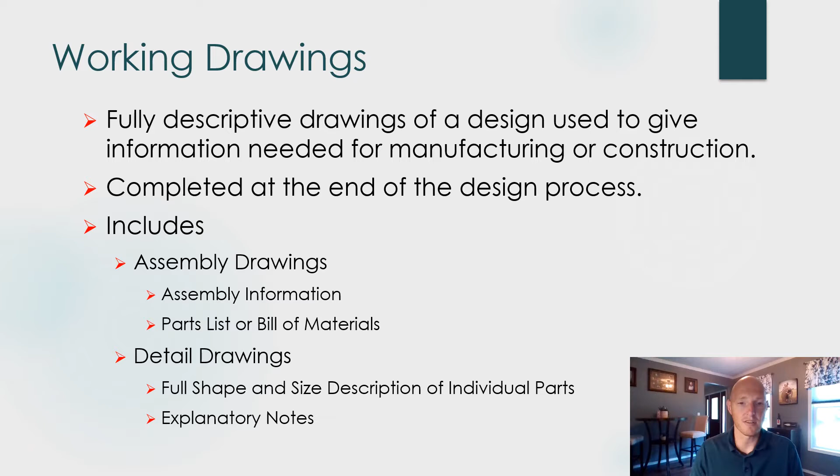So your working drawings are going to include assembly drawings that show how everything goes together. It's going to include a parts list or bill of materials showing all the different components that go into your design, as well as detailed drawings, which is what we've spent most of the semester working on. The detailed drawings give us the full shape, description, details with the dimensions and materials and all that good stuff to create all the individual parts of your design.

So the assembly drawings are typically done after the detailed drawings are completed. So you know what all those individual parts of your design are going to look like, and now you can show how they all go together. One of the things that is going to benefit you from creating those individual part drawings first is that you can copy that geometry from those drawings into your assembly drawings, as you'll see when you complete the tutorial today.

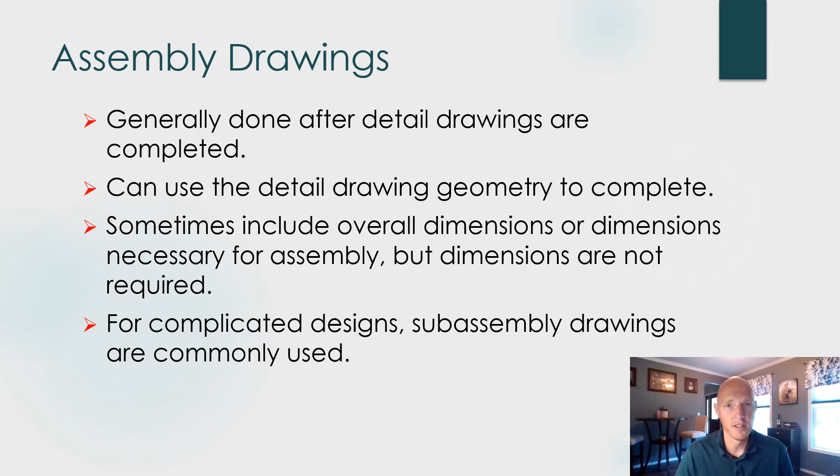Sometimes you might include some overall dimensions for the assembly drawings, but typically they're not necessary because the dimensions are included in those individual part drawings. If you have complicated designs where there are a lot of parts, a lot of assemblies, you might have sub-assembly drawings. For example, if you were designing a car, you wouldn't create an entire car off of one assembly drawing. You'd have sub-assembly drawings for all the different systems of that car.

Assembly drawings are not always section views. I know that's what you're going to see in your tutorial, but section views are only used if necessary. As the designer, it's going to be up to you to decide what kind of views are necessary to best show how the product is assembled. So it might be a section view, you might have auxiliary views, it might be just traditional orthographic projection, or maybe even an isometric drawing.

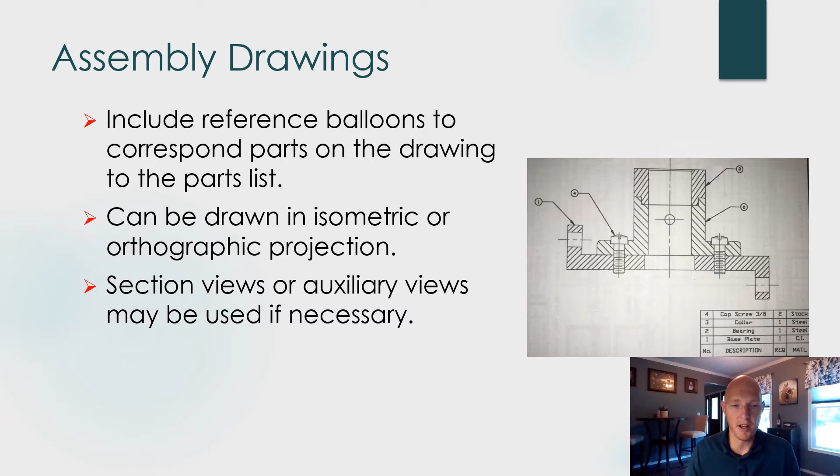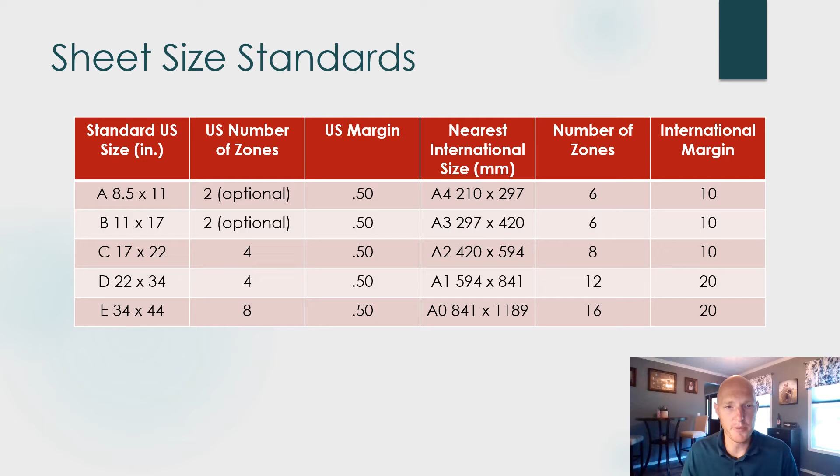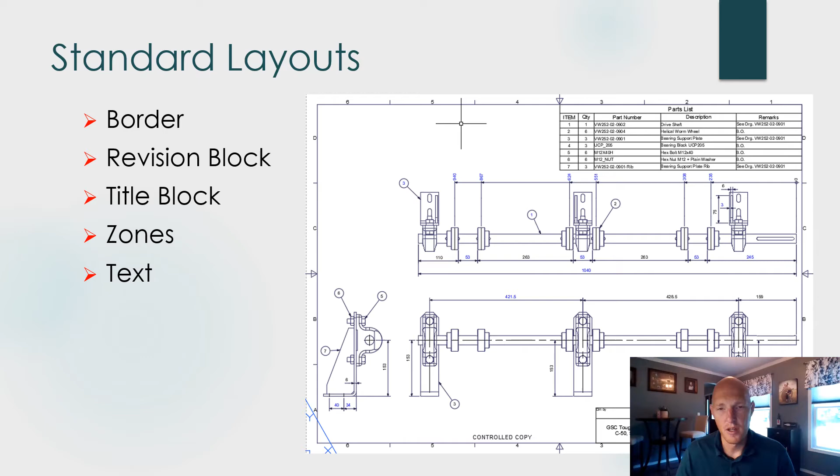Again, you're using the same sizes of sheets we've talked about earlier. Using standard sheet sizes, sometimes you may find that you need to use larger sheets to be able to fit the assemblies on properly. In a standard layout, you're going to have the border. You might have a revision block showing which version of the design, if you have updated versions. You're going to have a title block, and you might break the page into zones with larger size sheets.

Some additional types of drawings that you might see include exploded assemblies, which help to see how the parts fit together. You might have weldment drawings for things that are welded together, as well as structural drawings or schematics. We'll take a look at some examples of each of those.

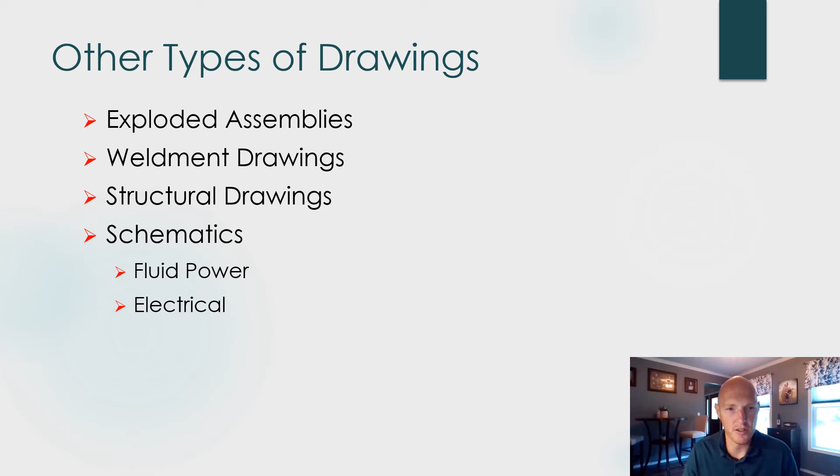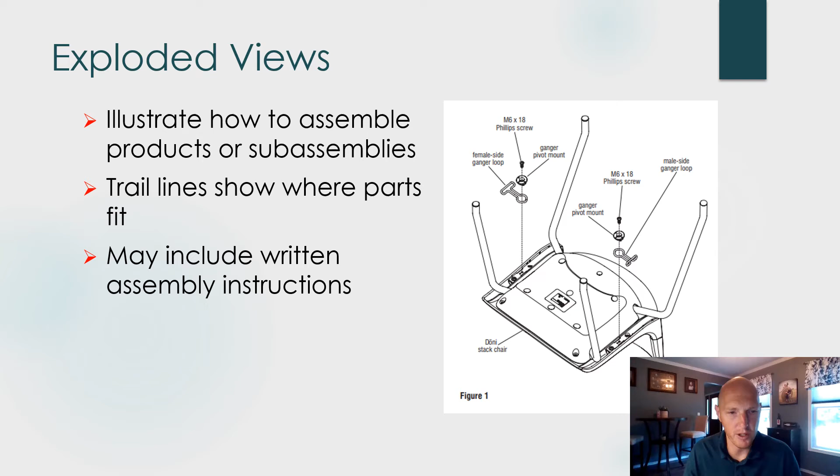So here's an example of an exploded view of a chair. So you can see here, instead of having the parts shown as they go together, they're exploded, they're pulled apart. So you can see the fasteners that are used to hold the clips onto this chair are shown as being pulled away from the part, and then we have trail lines that show us where those parts fit in as they're assembled. So these are great for creating assembly instructions.

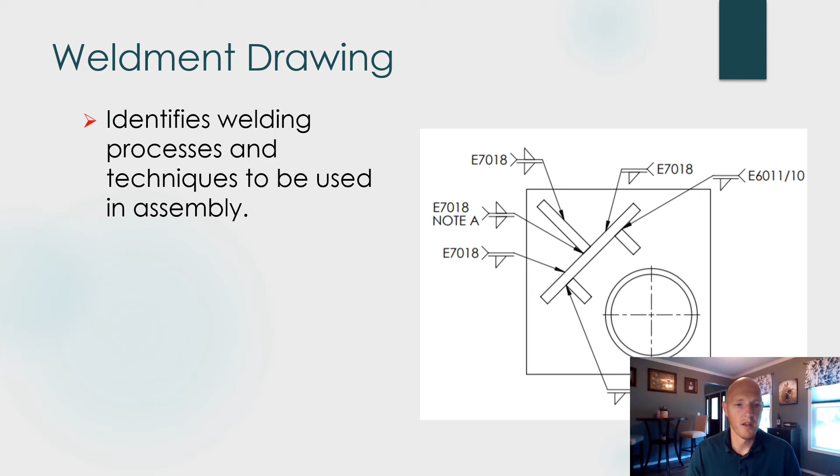A weldment drawing is going to have welding symbols on it. So those welding symbols are going to show the techniques that are to be used when assembling that weldment.

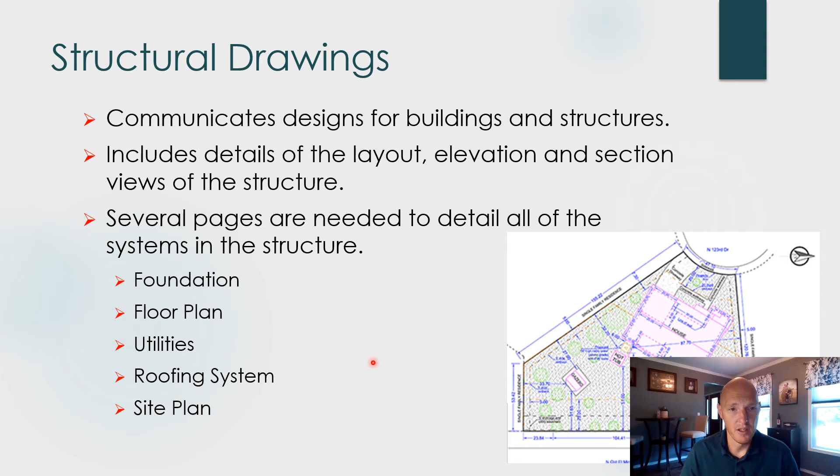So if you're working in the construction industry or designing a building for some purpose, you're going to have lots of different drawings that go together to make up that design. Here's an example of a foundation plan and a section view of a building. So you can see that foundation plan shows where all the walls and the footings of the foundation go together

in this building. And for the section view of the house, you can see that section view shows all the different parts of the house and how they get put together, as well as not just the dimensions of what fits where, but also the different materials that are used. You can see instead of using a basic cross-hatching pattern, there are different patterns that are used for different materials like the insulation and the concrete.

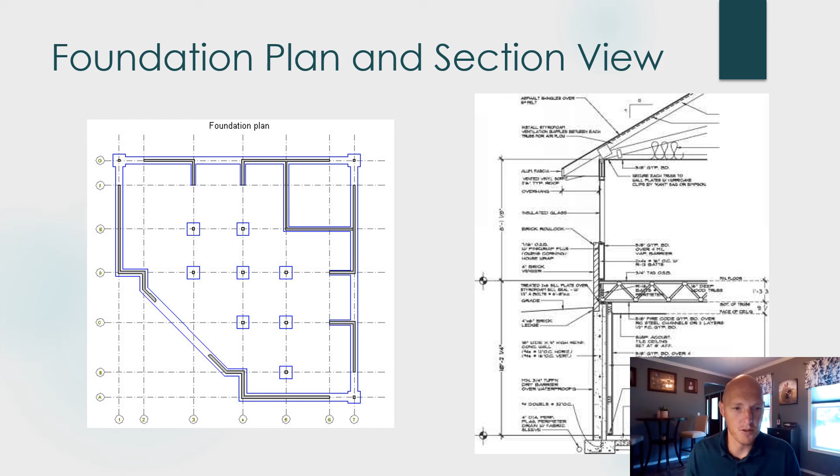So there are a lot of different industry standards that you're going to find that are going to be useful to create these drawings and that you'll have to learn depending on what industry you wind up working in. The elevation is showing what the outside of the building looks like. The floor plan shows how all the rooms are laid out, including dimensions.

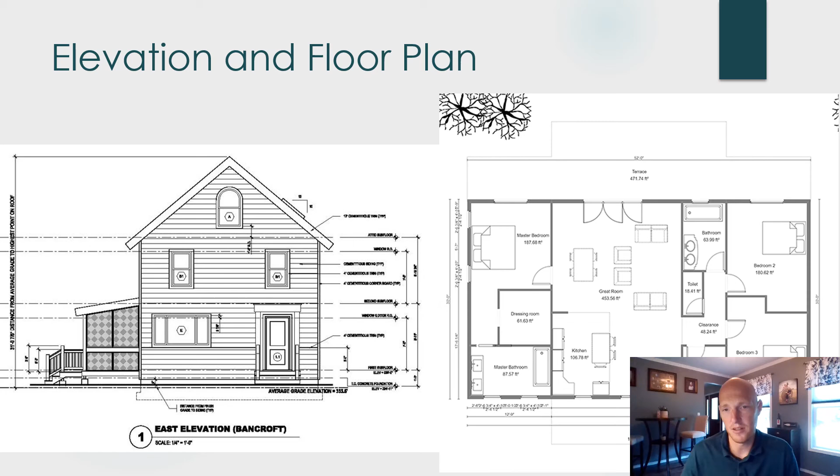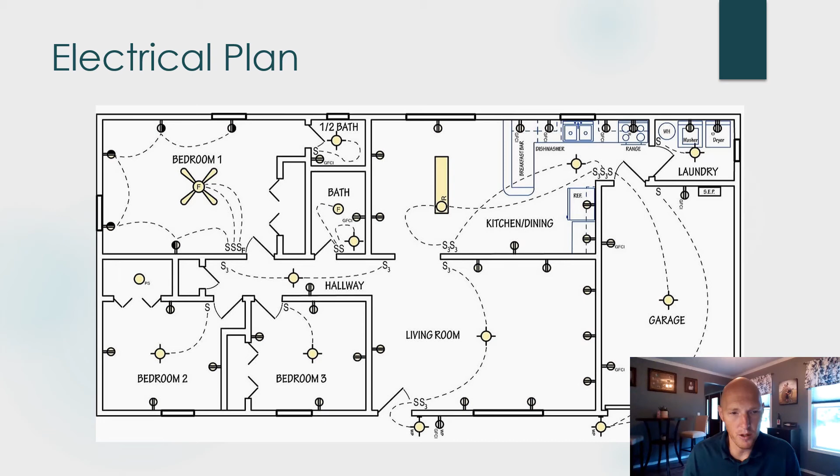So we have the height of all of the floors of a building shown in that elevation plan. The floor plan shows really the width and the length of all of the rooms and how they fit together. You would have a utilities plan like electrical plans, plumbing plans. Here's an electrical plan showing where all the electrical utilities fit into the building and how the wires are going to be run throughout the building.

Schematics show how things fit together. Whenever you hear the term schematic, we're talking about a drawing that doesn't look like the finished product, but it's a way to show how all of the different components of a system fit together. So a fluid power schematic could be used for a hydraulic or pneumatic system, and you can see there are lines showing what's connected to what.

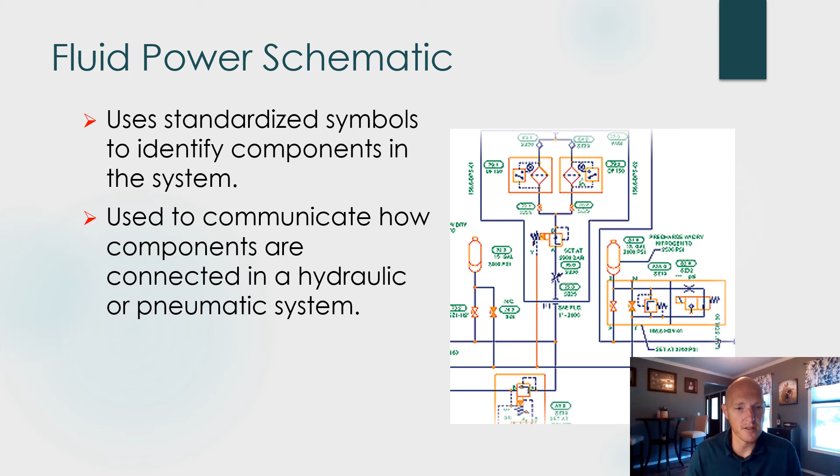So those are some working drawings and some examples of different types of drawings that we haven't really created in this class, but you've learned the CAD skills to be able to create them in AutoCAD. Just like what I had talked about in the last topic where we talked about how there's add-ins for creating welding symbols in AutoCAD, there's also different versions of AutoCAD, like AutoCAD Electrical, where you automatically have blocks in the AutoCAD system that you can just drag and drop.

When it comes to creating your last project, your project for this unit, you're going to be creating a full set of working drawings. Refer to my next video on creating sheet sets for how to create a set of sheets. Your project is to create a full set of drawings. So you're going to decide what individual part drawings you need, what you need to communicate the assembly, and you're going to put that together into a sheet set. So this is like your final project. It's a way to show everything you've learned from the beginning of class and put that together into your last assignment.